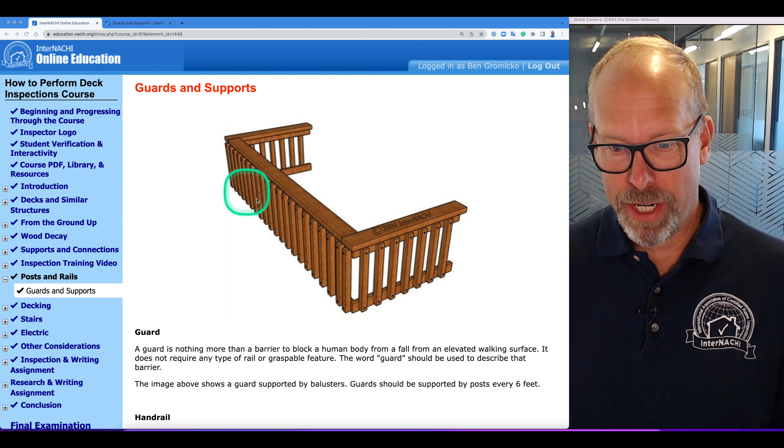Guards should be supported by posts every 6 feet or so, and you can see that this guard doesn't even have corner posts. Handrail. A handrail requires a graspable rail, and that's what a handrail is. It's a graspable thing. A guard is different. A guard is a barrier. A handrail is a graspable thing. The code standards split the two. We used to call it guardrails, but now code recognizes those two things are different.

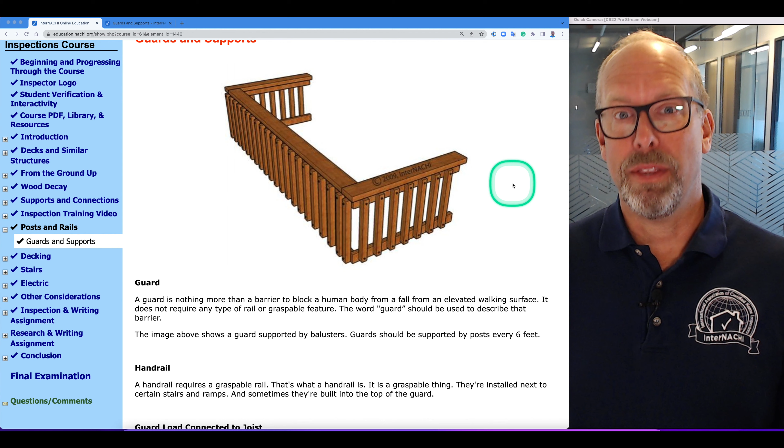Guard and handrail. The handrail is installed next to certain stairs and ramps, and sometimes they're built into the top of a guard. So there's the guard, a barrier to prevent us from falling off the deck, and a handrail, something that you grasp.

Let's talk about guard load connected to joists. Where guards are supported on deck framing, guard loads must be transferred to the deck framing with a continuous load path to the deck joists. The guard is connected to the joists. The guard must connect to the floor joists, not just the outer rim or band joist.

Where guards are connected to the interior or exterior side of a deck joist or beam, the joist or beam shall be connected to the adjacent joists to prevent rotation of the joist or beam. If the guard is connected along the exterior joist, it must be connected to an adjacent joist. Otherwise, this single joist connection will rotate and won't support the guard above adequately. Connections relying only on fasteners in end grain are not permitted either.

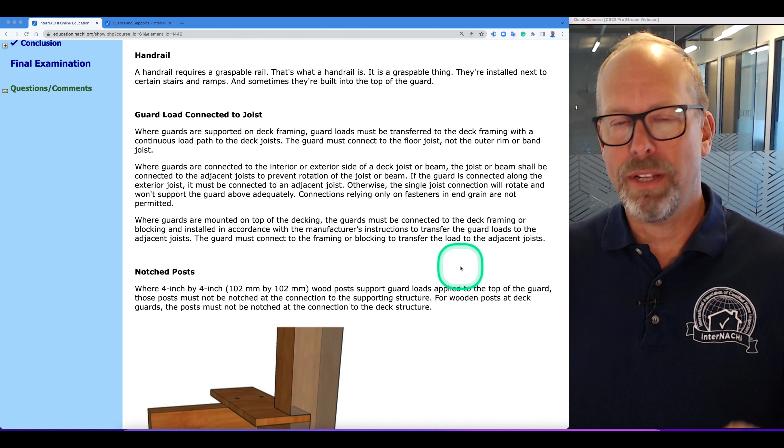Where guards are mounted on top of decking, the guards must be connected to the deck framing or blocking and installed in accordance with the manufacturer's instructions to transfer the guard loads to the adjacent joists. The guard must connect to the framing or blocking to transfer the guard load to the adjacent joists.

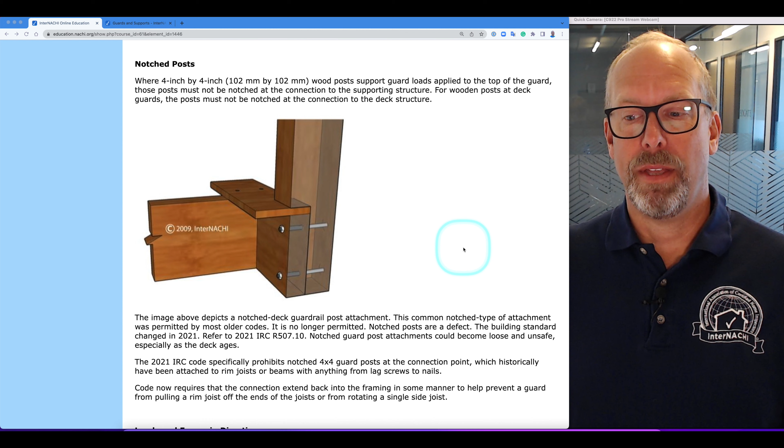Notched posts. Where 4x4 (102 millimeter by 102 millimeter) wood posts support guard loads applied to the top of the guard, these posts must not be notched. They must not be notched at the connection to the supporting structure. For wooden posts at deck guards, the post must not be notched at the connection to the deck structure. This illustration here shows a notched guard post attachment, and this is not permitted.

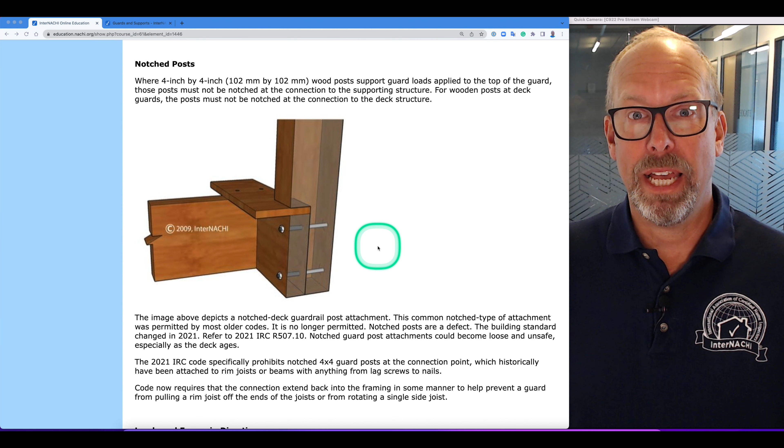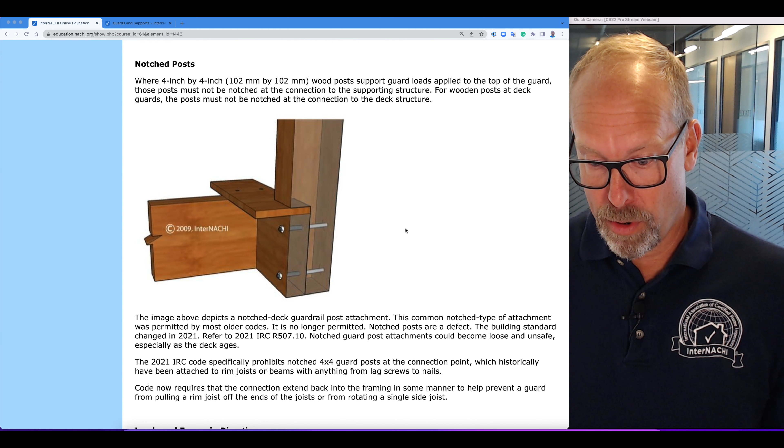This common notched type of attachment was permitted in older codes. It is no longer permitted. Notched posts are a defect. The building standard changed in 2021, referred to as 2021 IRC R507.10. Notched guard post attachments could become loose and unsafe, especially as the deck ages. The code specifically prohibits notched 4x4 guard posts at the connection point, which historically have been attached to rim joists or beams with anything from lag screws to nails.

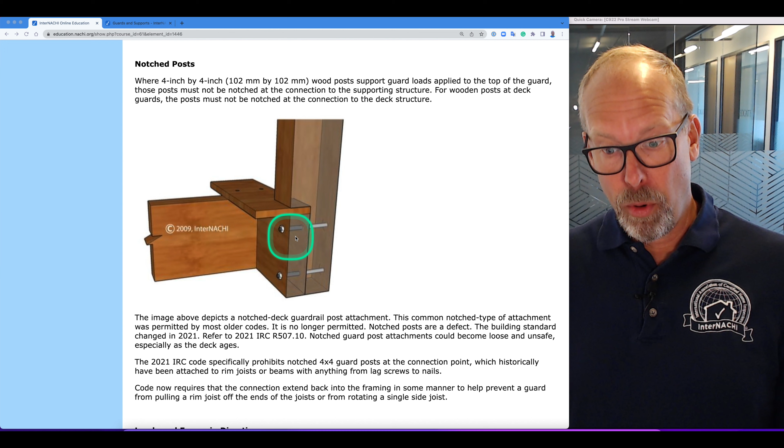This connection here. Code now requires that connection extend back into the framing in some manner to prevent a guard from pulling off a rim or pulling the rim off the ends of the joists from rotating a single side joist.

Loads and forces in certain directions. While a graspable stair handrail is meant to support us and must resist forces in all directions, guards don't. Guards that wrap around a deck are only meant to keep us from falling off the edge of the deck. According to the 2021 IRC code, guards will no longer be required to resist forces pulling inward or upward, just down and out. Leaning on or sitting on top of a guard is common on a deck, so a guard must be able to support that load.

Guard and handrail design loads are separate and they're different. The load design for guards and handrails is also different. There's also a difference between uniform and concentrated loads. The recent code 2021 Table R301.5 recognizes the differences between guards and handrails. They're different, and code separates them from each other and provides a separate column for concentrated loads.

The concentrated load direction for guards and handrails before the 2021 IRC code was, quote unquote, all directions. Now the new code changed the loading direction for guards to only downward and outward. Guards, a concentrated load of 200 pounds, downward and outward.